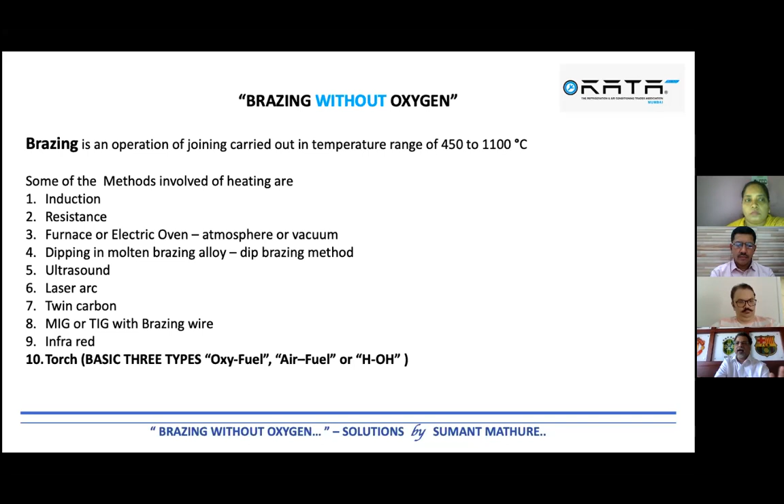So you get a cation and anion reaction where H and OH get separated. This same H and O is collected under pressure, passed through the torch, and burned. That is known as HOH burning, where oxygen or fuel is not used directly, only water is used. These are the three basic types of torch brazing techniques.

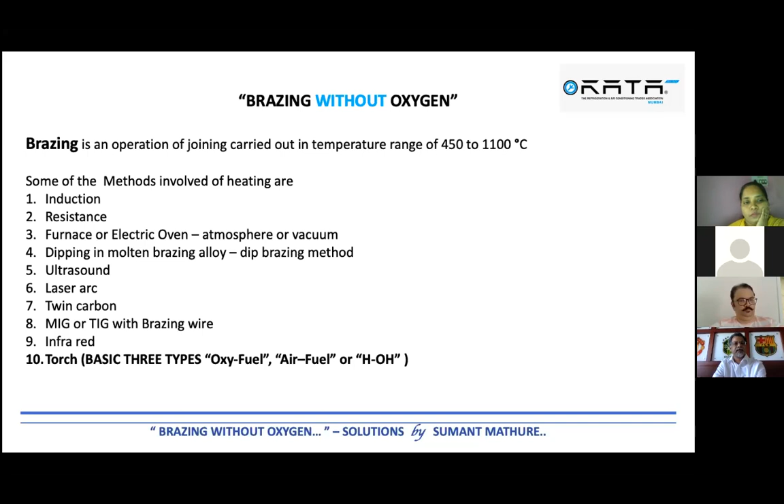Now, since our topic is basically on brazing without oxygen, we are concerned with torch brazing. In torch brazing, it is basically a combination of air, oxygen with air, or fuel inside the torch, burning at the exit of the nozzle. Hence, torch brazing without oxygen is not possible.

Oxygen is required at some end. However, we can use air, or we can separate oxygen from air, or we can electrically separate water to form H and OH combination. This kind of torch is known as a hydro torch or aqua torch.

So the first one, with oxygen and fuel composition, normally uses gases like acetylene, propylene, natural gas, or MAPP, which is methylacetylene-propadiene gas. Then there's propylene gas, and LPG which is again a mixture of butane and propane, etc. These are basically the gases used.

Here, actually, I had a video, but since it is not playing, I don't want to play it now and waste the time.

Second is air fuel. Most of our guests today will be talking about this kind of torch. So I will not talk much on these torches because there's a lot of information they can share with you in this particular area, where the design is also there and some other areas also there.

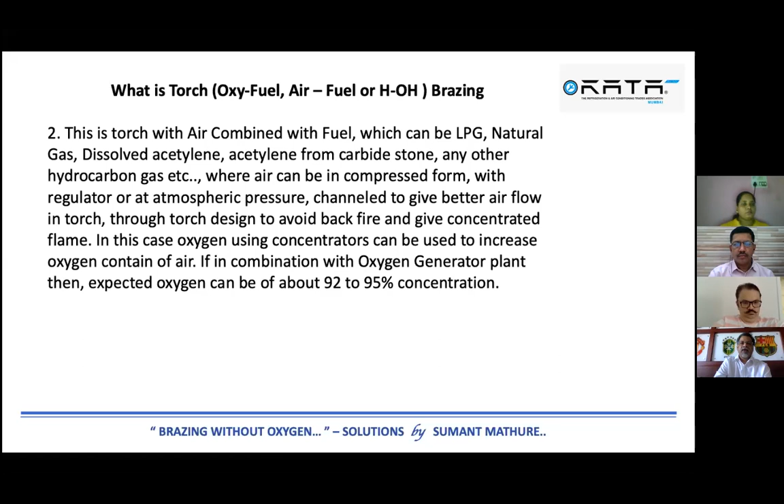Normally, there are methods of even getting oxygen from a generator, and there you can get oxygen up to 92%, 95% concentration. You may also see some videos where they're using concentrators and doing brazing using air or compressed air.

And there is a third type of torch, using fuel as H and OH. These are the torches where normally electrical current is given and you get hydrogen at cathode and oxygen at anode. These are then separated and combined into some chamber.

It can be pressurized, and the whole thing can be brought through one single pipe. It has a higher calorific value simply because it is forming a single molecule. There is no loss, no byproducts, and the pollution is less in this kind of thing. These are known as aqua torches or hydro torches.

Many people in Europe, Korea, and America are using these aqua torches or hydro torches. If you see some of the jewelry industries, they've been using aqua torch as a pencil torch for more than 15-20 years in India. So aqua torch is not very new to India. It is already there for jewelry manufacturers, where the pencil torch is used and is very common.

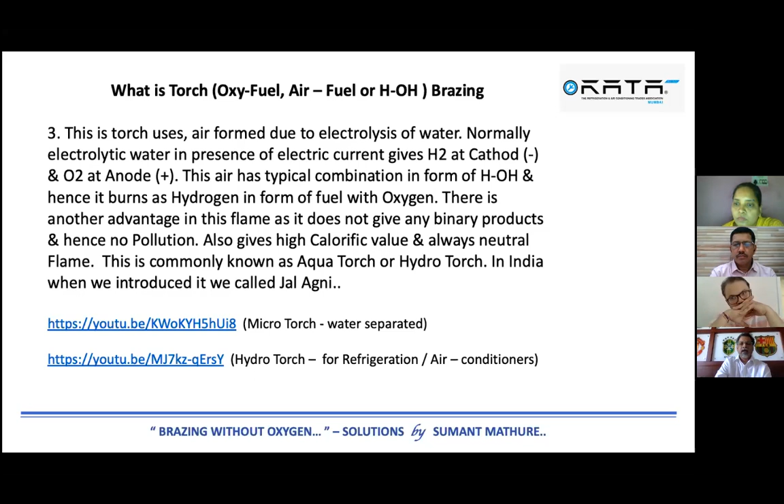So this is the third type of torch. Now, what are the requirements? If you put it from the user point of view, what are the requirements they want in any kind of brazing? So I've jotted down a few requirements, both from the user point of view and from the torch point of view. This is for discussion as well as for you to think about whenever you are deciding on a torch.

Number one, you should have a good flame pressure. Your inlet gas pressure should be good, so your torch design is very, very important in this. You should have a flame which gives a high calorific value, because the more the calorific value, the lesser the time required for brazing, or lesser losses on the gases.

Then you should have a full combustion requirement. There should be 100% combustion with the fuel and oxygen. If you don't have proper combustion, then the area where you are doing brazing can become poisonous for you, because most of the gases coming out are then carbon dioxide or carbon monoxide.

Then you should have a concentrated neutral flame. If you have a concentrated neutral flame, you will always be able to do better brazing, because you can then concentrate your efforts on the area where you want to hit, rather than hitting a larger area. This is known as having no flare. And the last requirement is less pollution. As I mentioned about combustion, the byproducts from combustion should not form that much. So that is something very, very important.

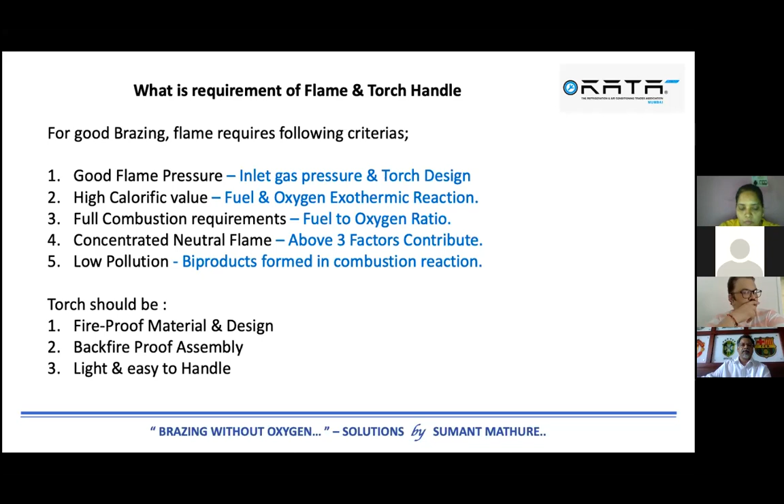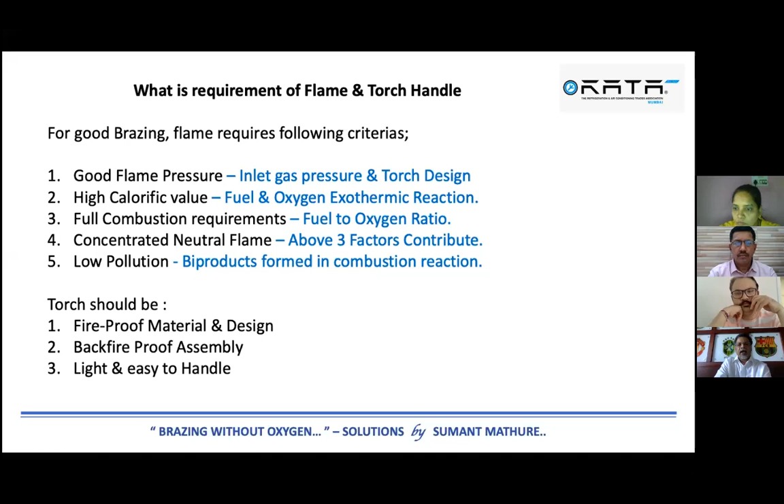Now, when you think of this, what sort of torches must we have? We should have a torch with fireproof material or fireproof design. You should have a torch which does not give any kind of backfire, or at least has a backfire-proof assembly. And the torch should be light and easy to handle. So these are basically the three requirements of the torches.

Now, many people ask me as a consultant, what should the ratio be between oxygen and acetylene, for example? So I have given you the reaction here, and it's very easy to understand. If you take 2 molecules of acetylene and 2 molecules of oxygen, the very first primary reaction you get is 4 of carbon monoxide and 2 of hydrogen. This is normally called the primary reaction in the core. So whenever we say a neutral core, what is the core composition? Everybody says the core composition is one molecule of acetylene with one molecule of oxygen, which is not entirely right.

But you have to consider the secondary reaction also, which happens in the flare: the 4 of carbon monoxide and 2 of hydrogen then need 3 more of oxygen to complete the reaction, forming carbon dioxide and H2O, water molecules. And that is a complete reaction because all the products formed are 100% stable. This is the whole reaction.

Now, if you see this reaction, you have 2 molecules of acetylene requiring 5 of oxygen, which means 1 molecule of acetylene requires 2.5 molecules of oxygen to form a complete combustion reaction. So the ratio comes out to be 1:2.5. Whenever you use air instead of oxygen, your ratio may increase to 1:3, 1:4, or 1:3.5. I think the other people on the panel will explain this maybe better. But this is how your pressure or composition would change to get complete combustion.

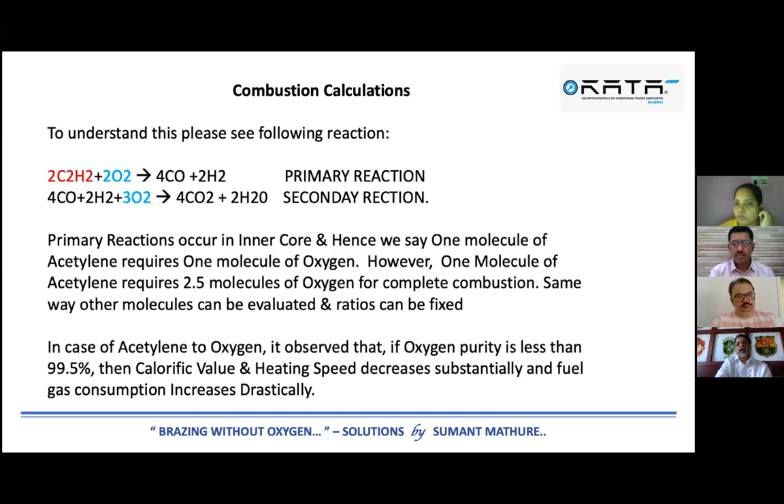So this is just one of the thoughts I think we should consider when having a torch without oxygen. And here I'm suggesting some solutions. The very first solution is to try to convert the gas brazing joints to the nearest possible heating source, like we have seen with the 10 sources. Out of those, the 10th one was the gas brazing or torch source.

So the rest of the sources are available. If you find that you have a joint or combination of metals where you can use any other method of brazing like induction or resistance, you may be better off changing to that. For that, you need to have a joint design, and you may have to consider the limitations of the new heating source. If that is possible, then you can go for that.

The second choice is for joints where more heating, time, and more flare is acceptable. Sometimes when you braze with air and acetylene or air and LPG, you'll find that the flame is not that concentrated, it has more flare. So if you intend to heat only a 5 millimeter section but end up hitting double or triple that section, like in HVAC joints, that's acceptable, then you can go for LPG or acetylene with air.

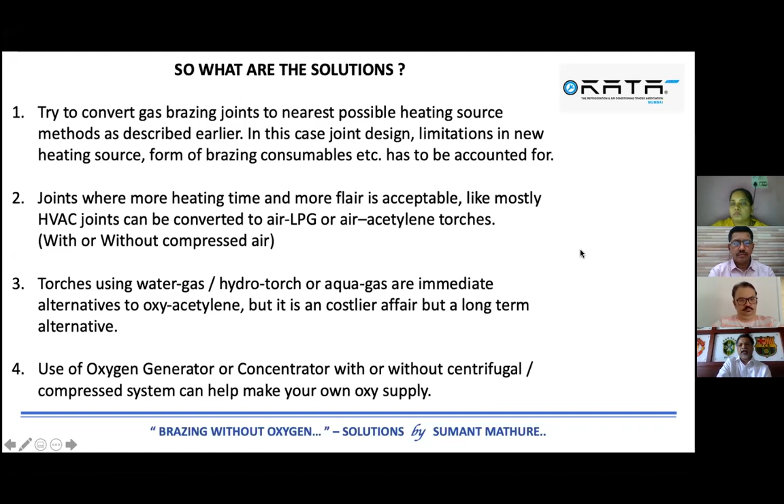The third option is using a torch with water gas, hydro-torch, or aqua gas torch. These torches are a little expensive to buy, but for long-term use the working cost is very, very less, making it a better alternative. The fourth alternative is to have your own oxygen generator. I think many people are doing that kind of thing, having their own oxygen generator.

So which means you will have your flame to do your brazing job. In torch brazing, we have mainly two options of torches. The first one is air fuel, which we'll discuss today. I'll give some information about it because this option does not require any oxygen source, since it's already in the atmosphere, it's in the air. The second one is oxyfuel, which has both a fuel source and an oxygen source.

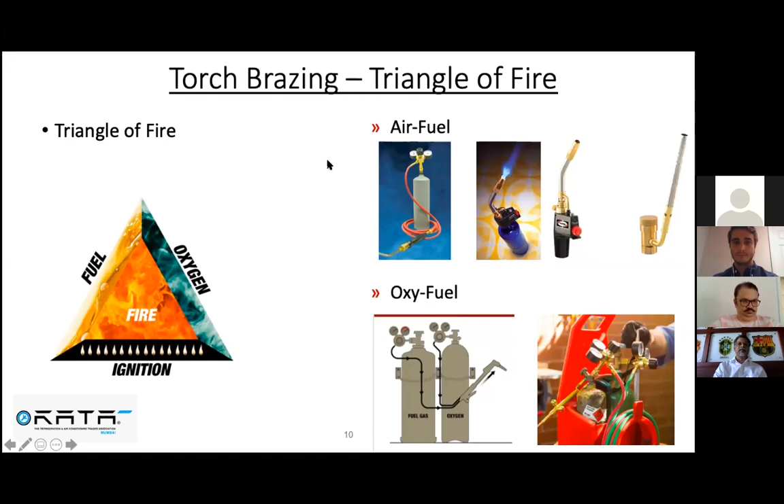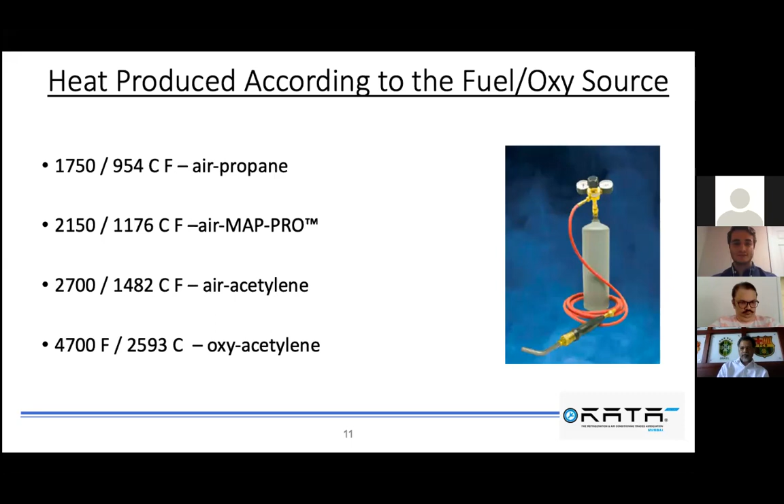So we can see that there is a wide difference between oxyfuel and air fuel, and this comes from the source of oxygen.

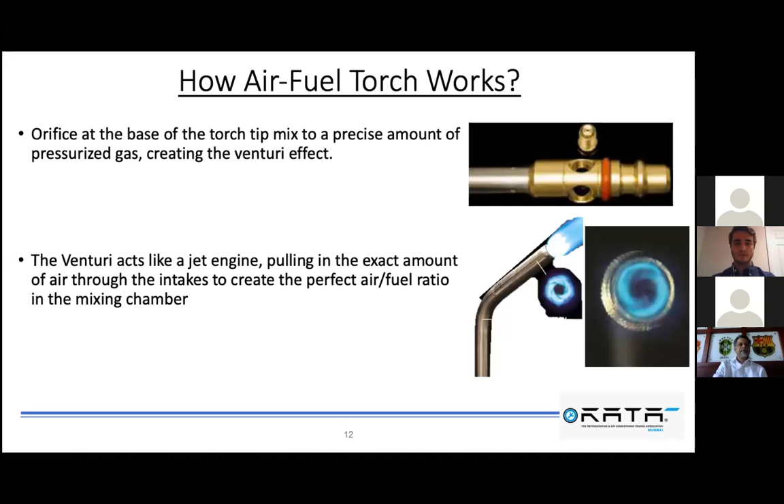Benefits of an air fuel torch: first of all, you don't need an oxygen source. Here in the US, a lot of contractors, people that go to your house to fix your HVAC or plumbing pipes, would rather carry just one cylinder instead of carrying two, oxygen and fuel. And in today's situation in India, it is also a solution for those who used to use oxyfuel torches.

It requires less equipment. You do not need to adjust the flow of the flame on the torch. With an oxyfuel torch, you have to adjust the regulators, the pressure according to the tip you are using, and also the valves on the torch to adjust the flow according to the tip. So you have a very unique measure basically for each tip used in the job.

When we are talking about air fuel, for instance, we use for acetylene just 15 psi. I think 15 pounds if I'm not mistaken, but it's just a fixed amount, always 15 psi. It doesn't matter the flame you want. If you have an adjustable torch and want a lower flame or a hotter flame, you always set it at 15 and you'll get your job done.

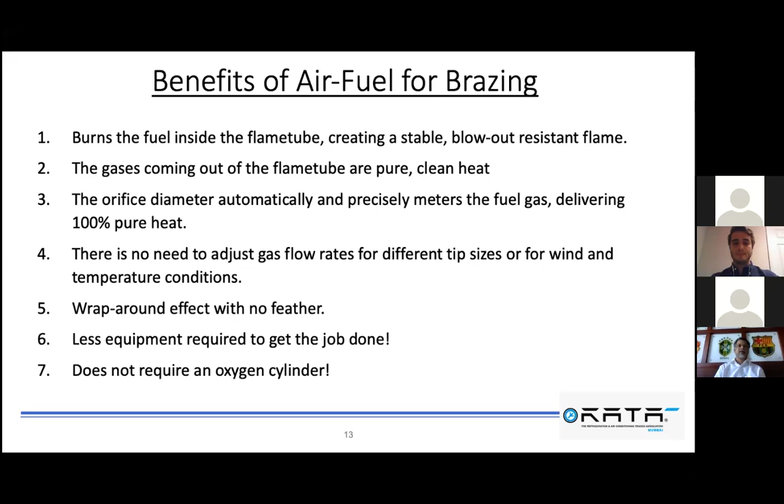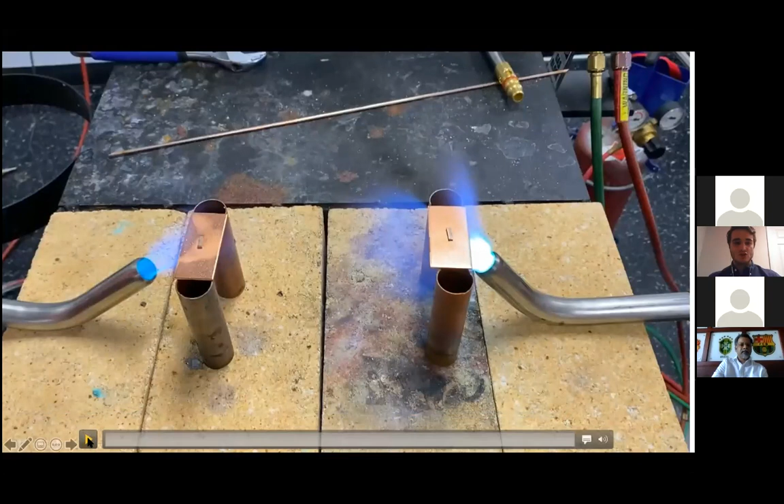This video, I'm not sure if it will play well, but perfect, we are able to see it.

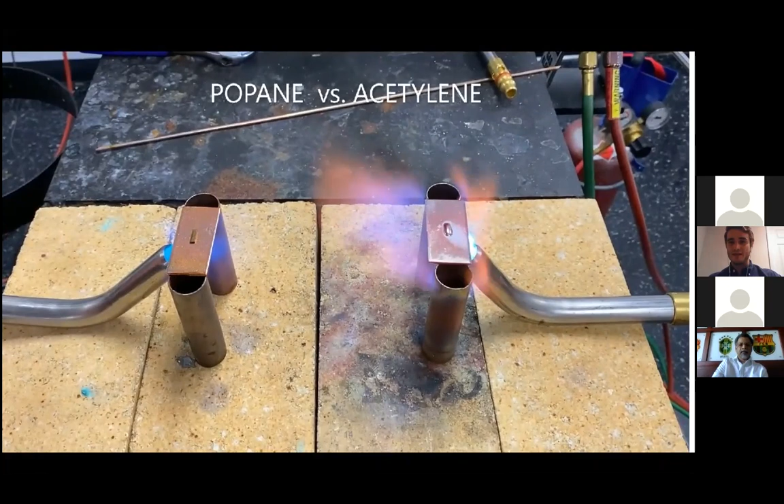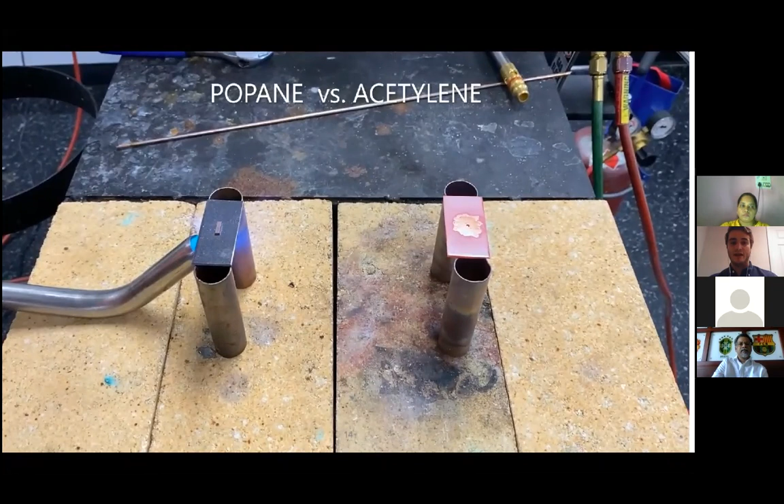This video is a homemade video we did at Harris. Myself and my manager recorded this video to show Faith and our partners how air fuel works, and mainly the difference between acetylene and propane air fuel.

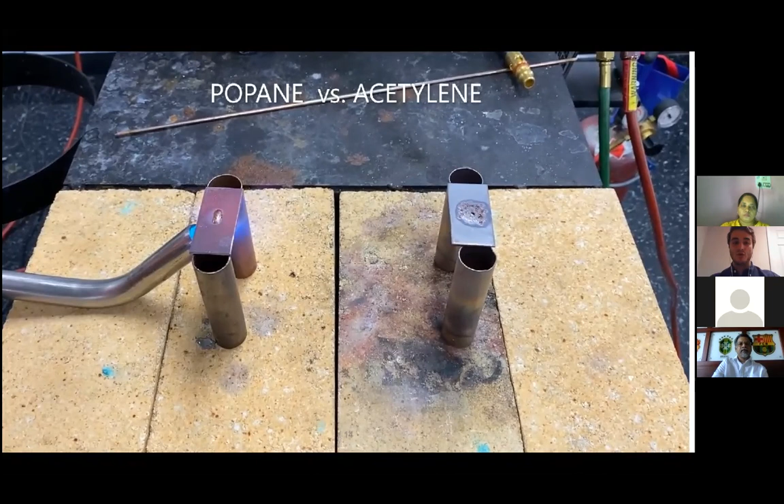You can all see the difference on the left side. We have the propane torch, both at the same pressure settings, open at maximum level, valves wide open. But you can see that it takes double the time, as Mr. Mathur was talking about before. He said around 15 seconds on acetylene and 30 seconds on air propane, and this is exactly what we found.

It was actually 16 seconds on the acetylene to start melting the alloy, and 30 seconds on the propane.

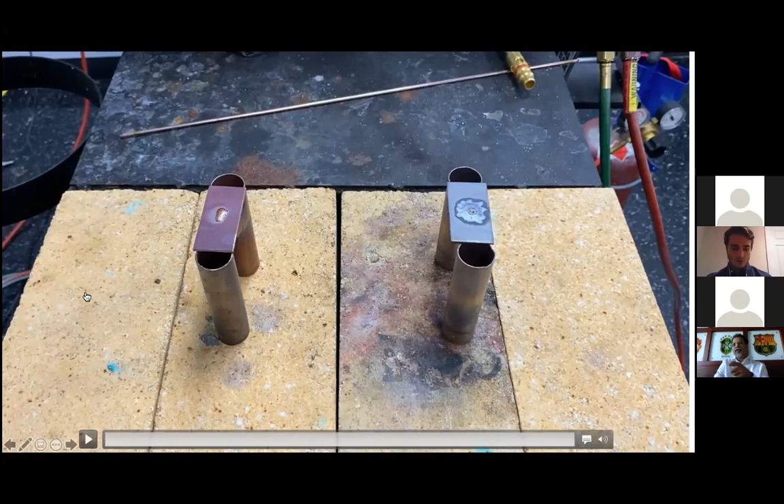The reason behind that: if you look into the combustion rate on air fuel, for acetylene it is 1.5 oxygen molecules to 1 of acetylene, and for propane it is one propane molecule to 4 or 5 molecules of oxygen.

So you don't have it as pure as when you're using an oxygen cylinder. That's the main reason why acetylene will work way better, hotter, and better for your application on air fuel torches.

Thank you very much, good evening to all. Thank you, Mr. Mathur, for my brief introduction to all. As you know, in the introduction Mr. Mathur has quickly listed the various brazing techniques that have been used for brazing, and we can say the technique, rather what Mr. Mathur said, is basically a heat source which is required for the brazing.

So these are the techniques one can use when the industry is facing a scarcity of oxygen. In this list, one technique is called torch brazing, and the hydrogen generator is the technique which is among the torch brazing techniques. This hydrogen generator basically produces a safe and better brazing flame, using hydrogen and oxygen generated by electrolysis of water.

As Mr. Mathur rightly said in the beginning, it is not a new technology. It is known by science way back in the 1800s. So what you need to generate hydrogen and oxygen: we need water, an electric power source, and we have to do electrolysis. We may or may not need chemicals, because some of the hydrogen generators are made to work with pure water, or maybe with little chemicals added to initiate the reaction.

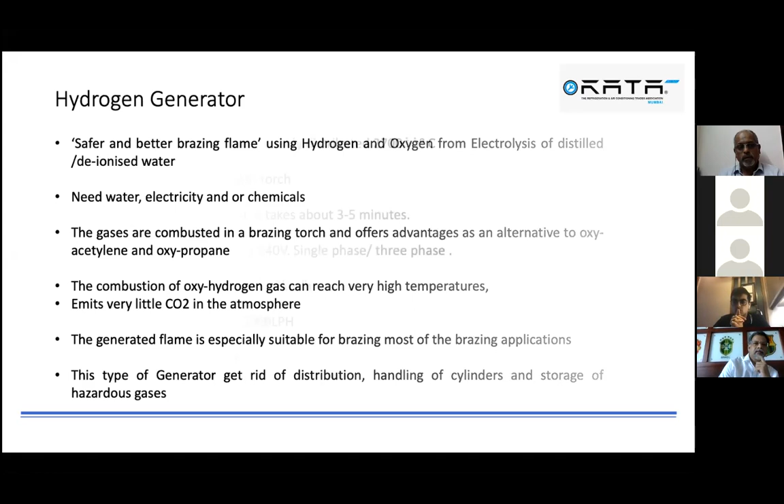So these hydrogen generators produce a flame temperature of around 2700 degrees centigrade. The design of the torch is so light, it's easy to braze, and the weight is absolutely light. You people must be worried that the system will take a long time to generate this gas once you put it on. For your information, it takes just 3 to 5 minutes after you switch on the generator. You can start your brazing operations within 5 minutes.

These generators are available on AC and DC power sources. The voltage requirement can be 110 to 240 volts. They are available in single phase as well as 3-phase, depending upon the capacity of production. The power consumption also depends on the rate of producing these gases, varying from 2 kilowatt per hour to 12 kilowatt. With 2 kilowatt, we can produce gas at a rate of 300 liters per hour. When you reach 12 kilowatts per hour, the rate of generation will be 3000 liters per hour. So depending on the capacity of the generator, the gas produced will be different.

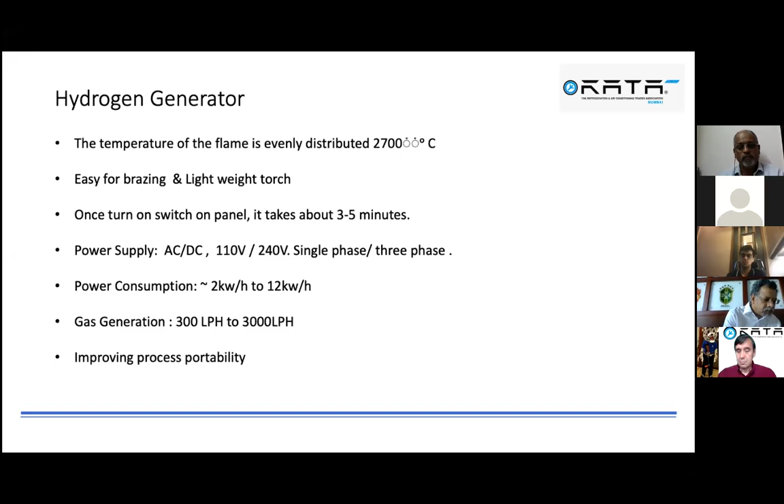And these generators are not heavy in weight, they are very portable. So you can easily install it, relocate it, reinstall it - very light in weight and easy to install. Next slide, please.

So in conclusion, what I mean to say is that this hydrogen generator is a very reliable and economical technology, which can serve to sustain this industry in this competitive age. As you know, today we are in an era of cost competitiveness, so with this technology or heating source, we can be cost competitive - our brazing components can be cost competitive.

From the safety point of view, there is no flashback, so operator safety is taken into consideration. It has produced a very uniform temperature, and the flame temperature is around 2700 degrees centigrade. The operation and the flame are very silent, so the noise pollution is also less compared to conventional

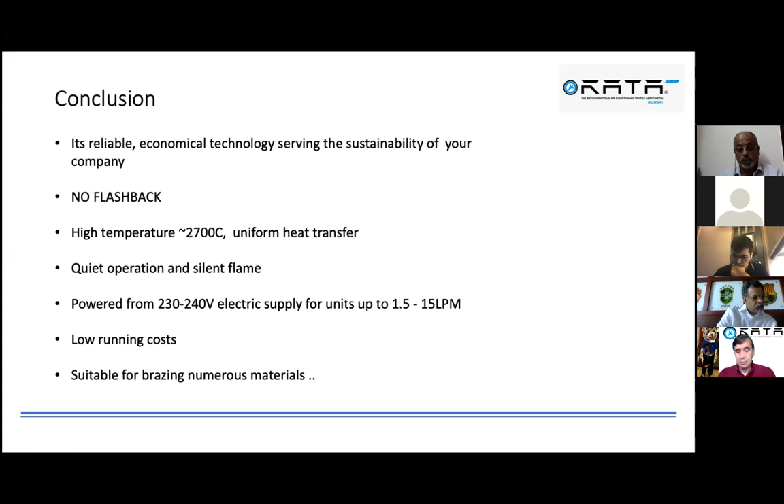Gas is being generated. The running cost is very low, and the cost for maintaining is also very low. The running cost is the cost of the distilled water and the power required for generating the gas through electrolysis. And as I said, it is suitable for numerous brazing applications, or we can braze numerous materials. Thank you.

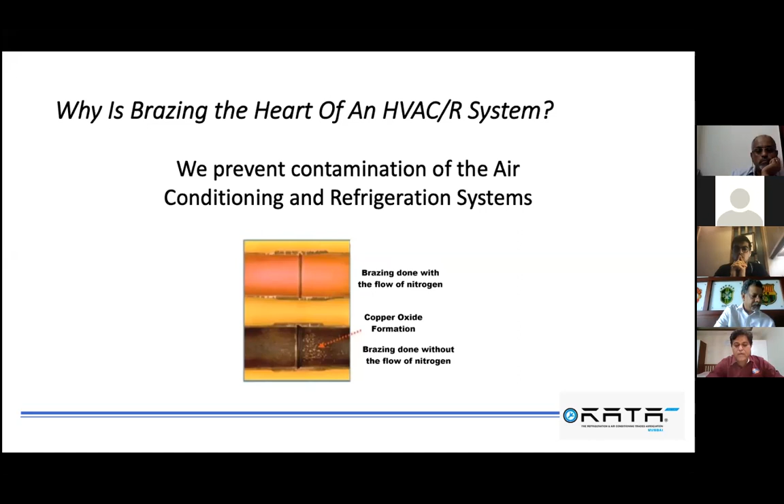In our first slide, we have mentioned what is required for successful brazing. We have to flow nitrogen while doing the proper brazing. Next, please.

To flow the nitrogen is not sufficient. We have to know what pressure of nitrogen we have to flow during the brazing process. So there are a lot of products already available in the market, like the nitrogen flow indicator, NitroView. I think Mr. Richard will give some more ideas about such products. So, Mr. Richard.

Thank you, and I just want to appreciate the invite to be among such a distinguished organization and guests. It's a pleasure to see you all, and definitely this is an important topic on brazing. There are so many methods. I just want to express that one always must evaluate their specific needs and requirements.

As Mr. Bernardi mentioned, air fuel or air acetylene torches are very common usage in the United States, but not so much in the rest of the world. There are reasons for that. Number one, it's unknown. Number two, many times the technology in the air fuel torch is also unknown, and so lesser designs and technology are introduced in the market. They don't work and people don't use them. But in the United States, it's been a proven technology for quite some time.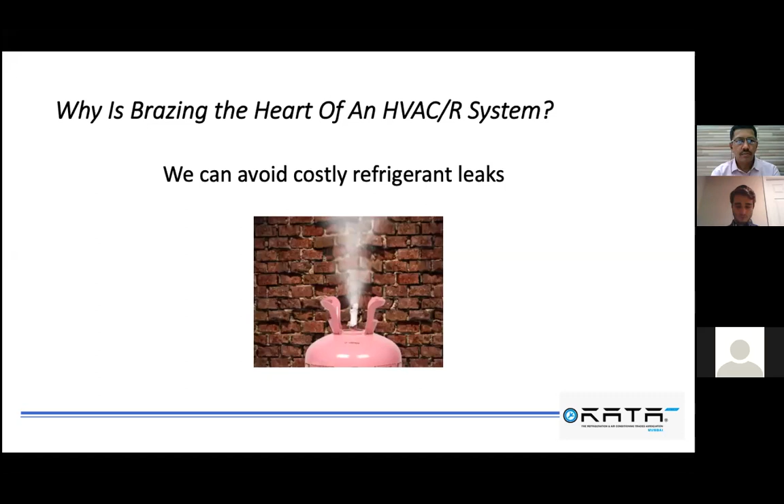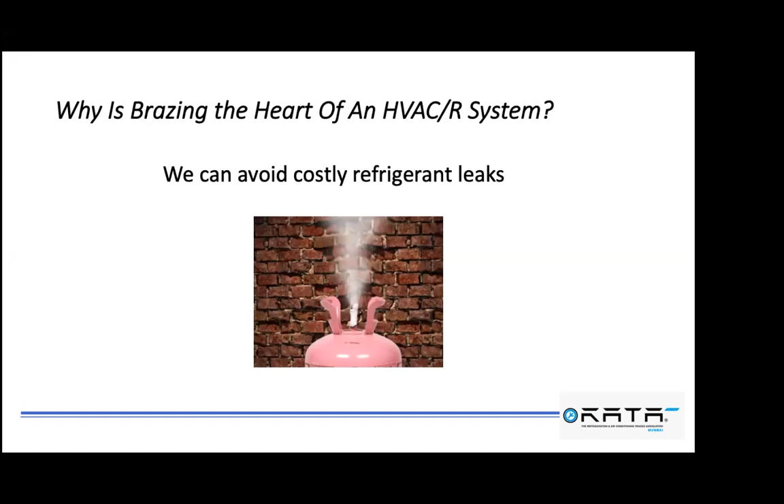So there are lots of pluses and minuses as to why you might go one way or the other. But in general, in HVAC, most applications and most technicians will be satisfied with air fuel, air acetylene precisely, to do the job for them. And as Arun mentioned,

we want to ensure, we'd like to think of brazing as the heart of the refrigeration system, because if you don't get that right, then you're going to have failure. You're going to have inefficiencies in the systems. You're going to have your expansion valves contaminated with soot and copper oxide that forms on the outside, and can also form on the inside.

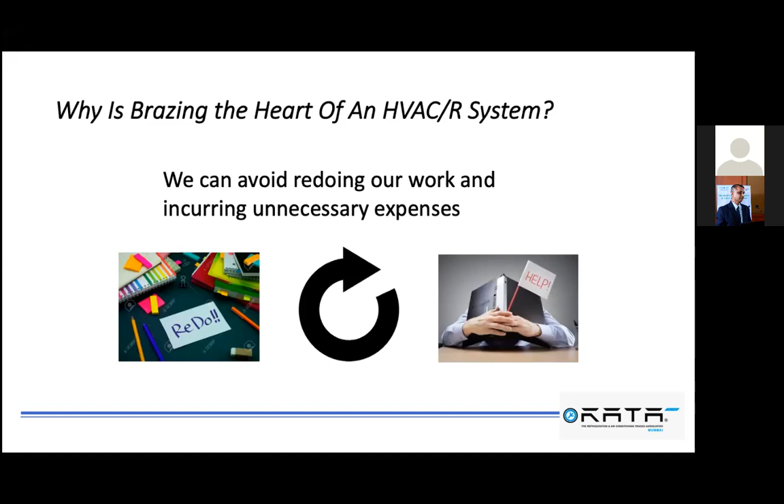That's why when we talk about running nitrogen through there, we have to make sure we're always running nitrogen to avoid forming that copper oxide inside, so it doesn't contaminate the expansion valves or run to the compressors and damage the systems. So proper flow is also very important, because if you don't have enough nitrogen flowing through the inner tubes to displace the oxygen, which forms copper oxide with the heat, then you're still going to have it formed. You want the correct flow, and you also don't want too much flow, because that will push against the joint and you end up having little pinholes and refrigerant leaks. So it's very important always to get the correct braze job.

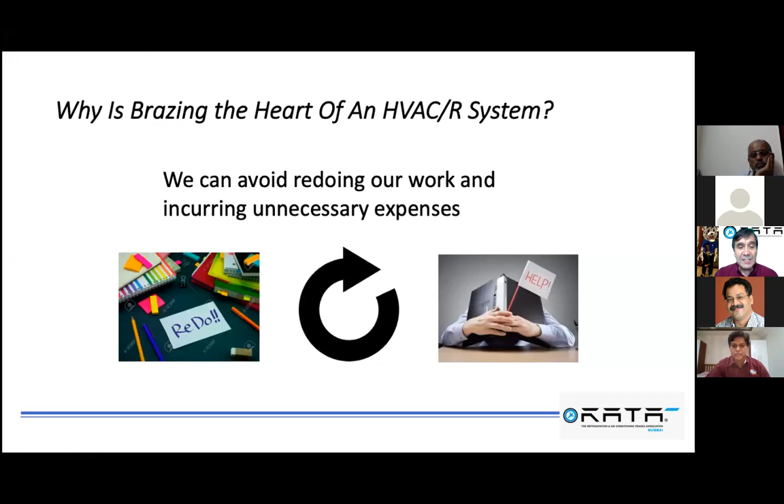I'm not sure how many more slides we have, but I want to express that as great as the air-fuel and air-acetylene systems are, there are a few limitations. One is the supply of oxygen - we're taking oxygen from the ambient air that's mixing with the fuel, whether it's LP, acetylene, MAP, or another fuel gas. So if you're at a very high altitude or in a very enclosed, small area, there may not be enough oxygen to mix. These are some considerations to take into account.

But overall, air-acetylene, for example, is very widely known here in the US, and as Mr. Bernardi mentioned, it's very low cost to operate as well. You use one tank, it's a lot more portable to get from one place to another, and it just provides the solution.

Finally, I want to mention that when we're faced with challenges as we are now during the pandemic, and the world faces so many different challenges in so many areas, it's just a reminder that we must always be preparing. I think it's awesome that an organization like RATA provides this knowledge base throughout the year. So take advantage of that and learn - don't wait for a crisis to know about these technologies. Be prepared, and it's always a great time to sharpen one's skills. I thank you for having me, it's been a pleasure seeing everybody.

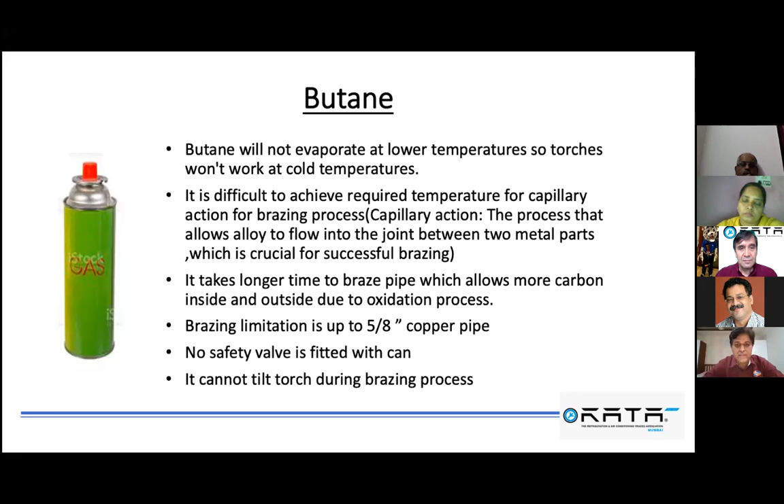It has a built-in safety valve or pressure relief valve inside the cylinder, because technician safety should be the first priority for our industry. It's also very portable - the net weight of the cylinder, including the gas, is not more than 800 grams. This fuel burns approximately 40% hotter than propane, allowing users to carry out hotter working tasks without needing any oxy-LPG setup.

Special torches are available in the market for propylene which can braze up to 2-inch pipe without oxygen - this is also very good to tell my technicians. Special torches with 360 degree swivel can operate in any position, which solves that problem with butane, since you cannot tilt butane cylinders. Here you can swivel 360 degrees. Next slide, please.

Mr. Richard, from here you have to go forward. Oh, excuse me - I have to do the PowerPoint from here, yes, from here it should be, but I don't know if we have the video incorporated there. It's already incorporated in the last slide - I think Mr. Samant already incorporated the videos.

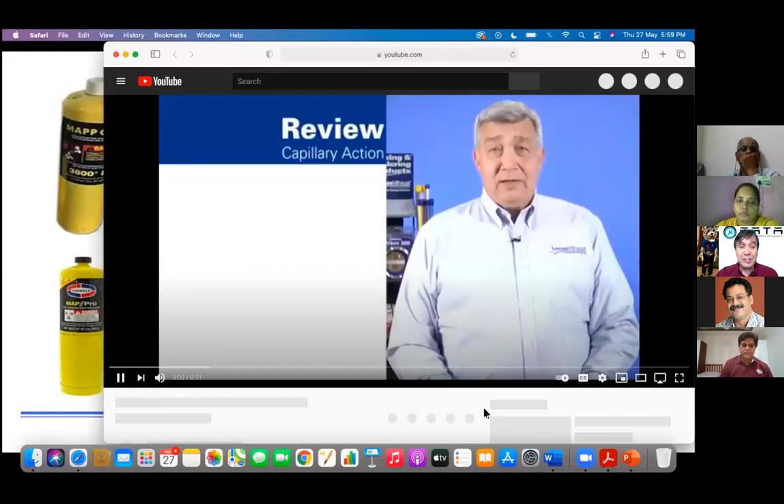That's where you actually form the strong braze, because if you don't have that penetration with capillary action, you're going to have a weak joint. And when you have a weak joint, any vibration is going to loosen that, and you end up with refrigerant leaks, which are very costly. So we use these.

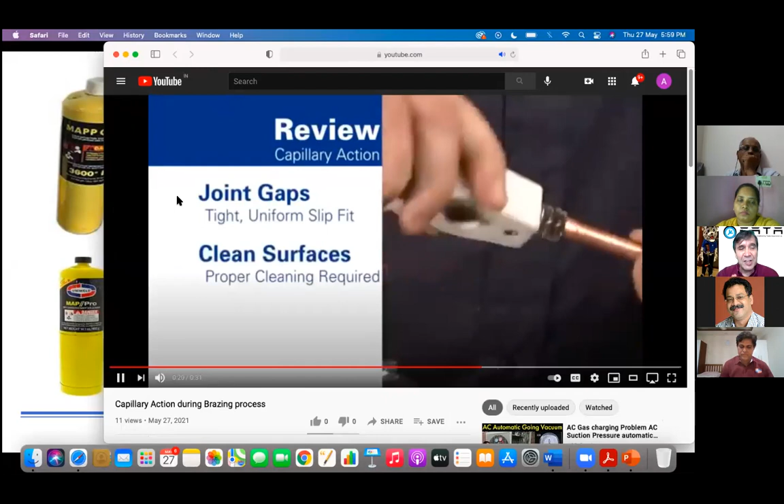Variation in spacing will affect the success of your brazing operation, because capillarity will be compromised. Second, cleanliness counts in brazing. Parts that are not properly cleaned may carry grease or other debris, which will impede the process of capillarity. Successful capillary action, the process that allows alloys to flow into the joint between two metal parts, is crucial to successful brazing.

That got cut a little short. What that part of the video shows is two glass plates, with ink running between them through capillary action. When there's a separation that's wider on the bottom than on the top, that ink does not flow all the way to the top.

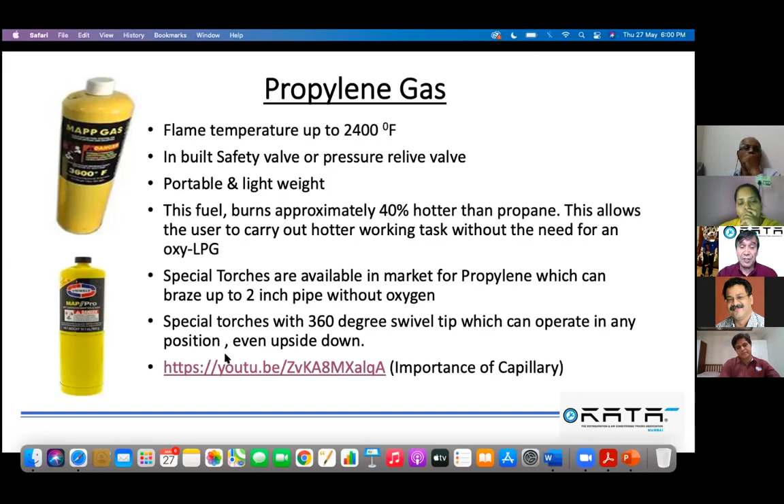Similar thing with a copper tube. If the diameters are not evenly spaced from the one being inserted into the other, you won't be able to form great capillary action and run the alloy through. So you want to make sure you get a good braze joint by having proper heat around the entire tube. It's important not just to fill the alloy on top, but it needs to penetrate the copper tube.

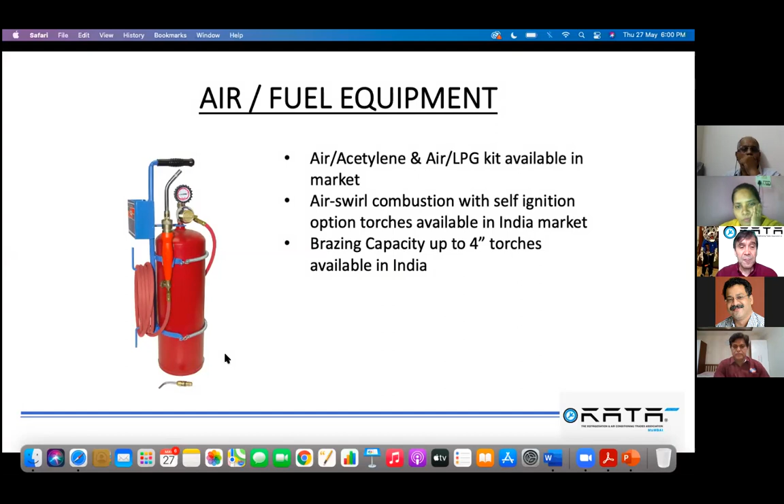This answers the technician's question about whether it's possible with LPG or acetylene without oxygen. We already have special torches available in the market called swirl combustion torches. These swirl combustion torches' flame work 40% hotter than other air fuel torches. It completely burns the fuel inside the flame tube, creating a stable, blow-out resistant flame.

The high velocity clockwise swirling flame has a wraparound effect with no feather. Higher velocity flame transfers heat better and minimizes the cooling effect of ambient air, so better heat transfer to the target decreases labor time and fuel cost. Next slide, please.

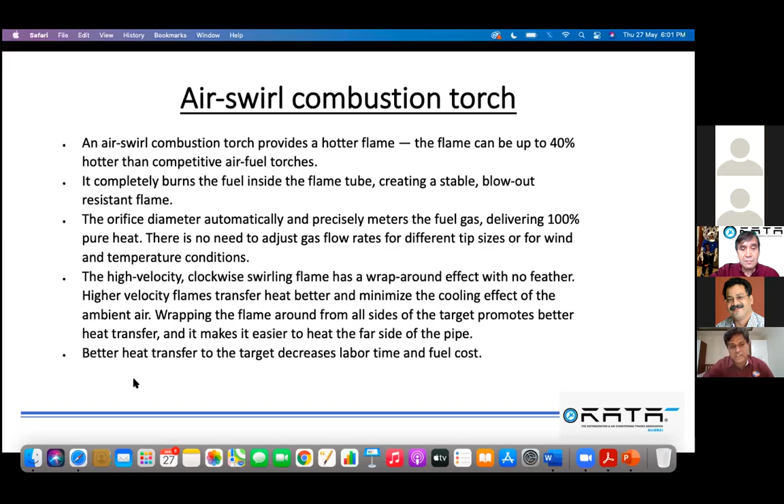These are some torches available in the market, the air LPG torches. With LPG we can braze up to 1 1/4 inch, and with propylene we can braze up to 2-inch pipe with the same torches. Next slide, please.

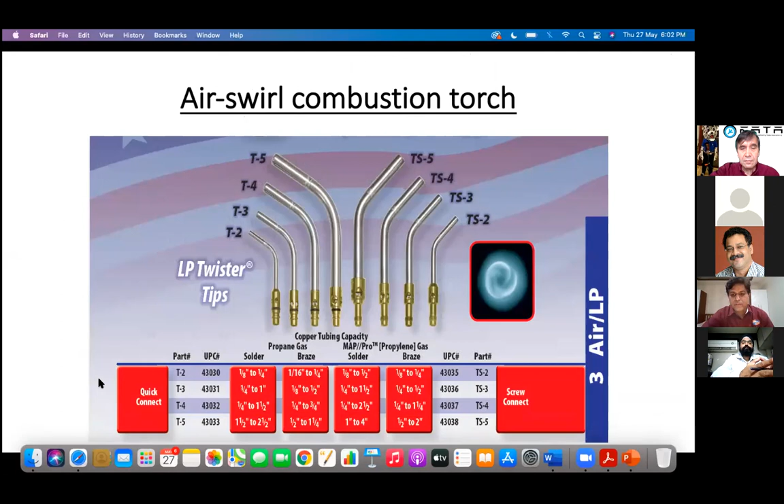These are some torches which work with air and acetylene. With acetylene we can braze up to 4-inch pipe without using oxygen. These are some specifications we have mentioned in this slide. Next slide.

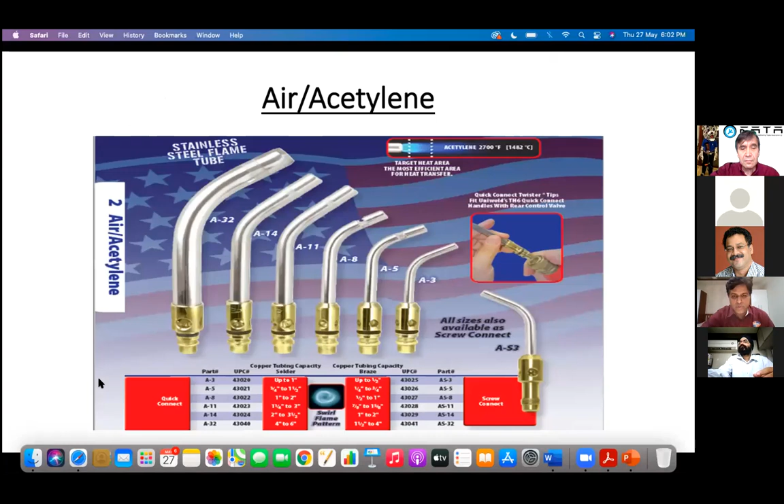The last question from the technician was: is it possible to braze a bigger size pipe giving 360-degree heat? So we have mentioned one video there - where is the video, Samanji? That is the Captain Hook video. Mr. Richard will explain this video more.

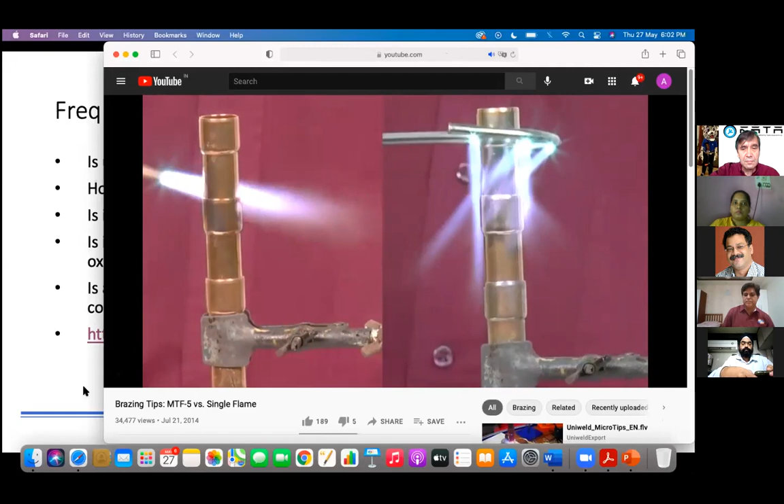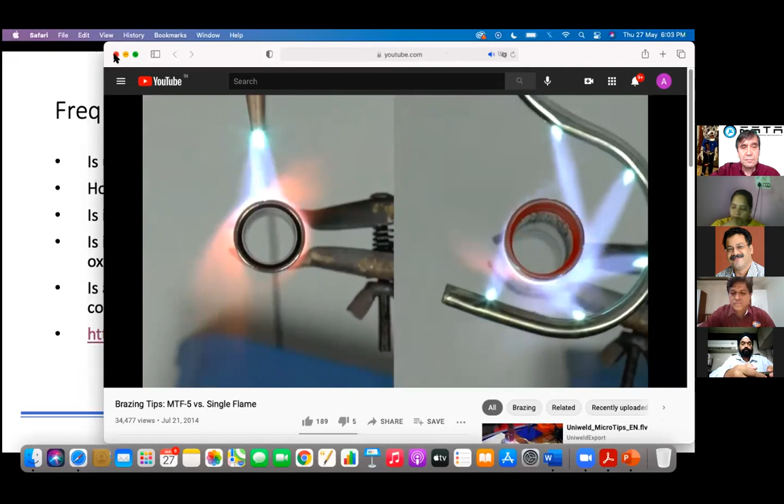Take a look at the performance of a single flame tip versus Uniweld's MTF5 multi-flame tip. With single flame tips, one must ensure to move the tip around the copper tube to achieve good heat distribution. With today's compact systems, this can be very difficult, particularly on the backside of the copper tube. Uniweld's MTF5 Captain Hook multi-flame tip, shown on the right, provides even heat distribution around the 360 degrees of the copper tube. In addition to providing 100% wraparound heat, the 40-degree flame angle easily flows onto the copper tube and away from sensitive areas, minimizing the chances of burning adjacent components. Uniweld, quality tools that go to work with you.

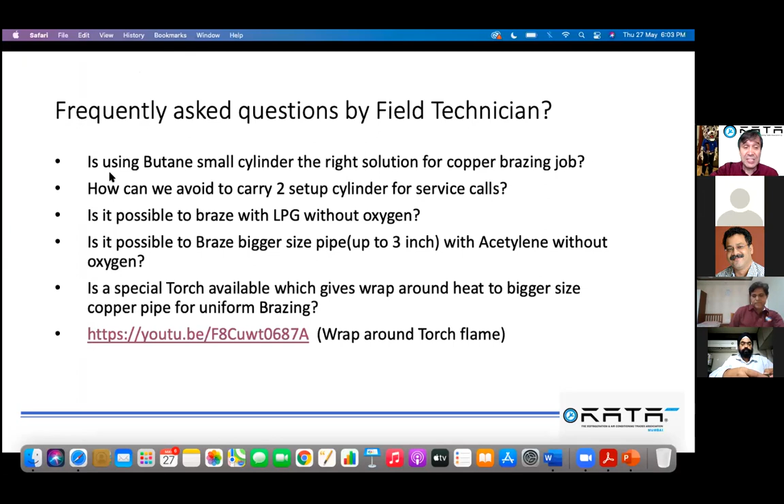So cleanliness of the tube, the proper size diameter uniform through the 360 degrees of the copper tube, and uniform, proper heating around the entire copper tube ensures that you get the capillary action required for a strong brazing joint, so you don't have leaks with minor vibrations, and you have a good, healthy system.

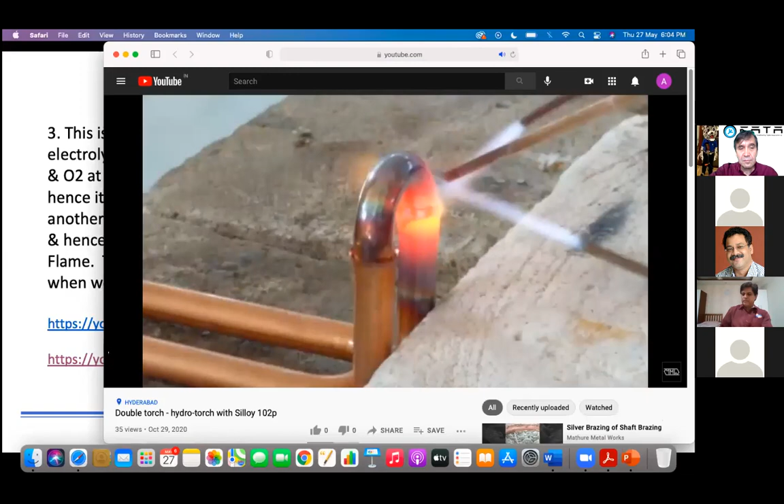This was with the hydro torch.

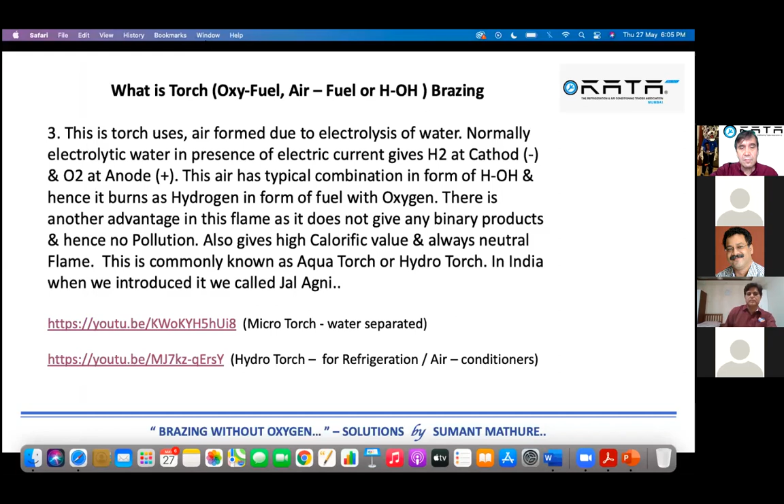This is what is called the pencil torch. It's just comparisons between the torches. And this is your standard torch, which is oxyacetylene.

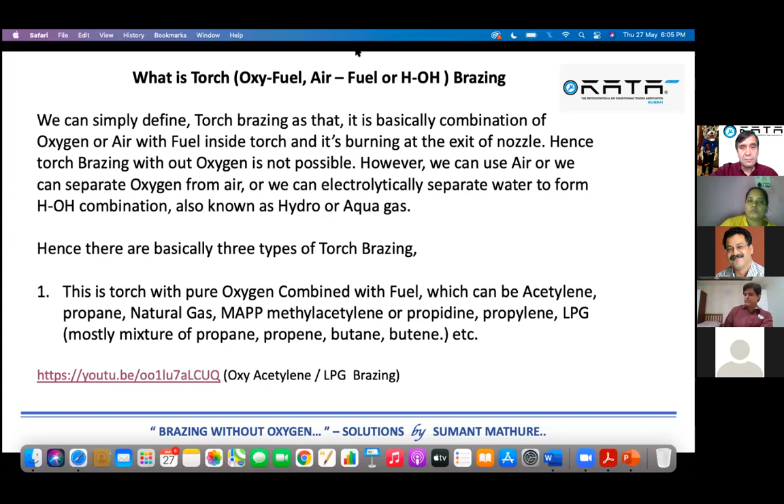Sumantji, there are a couple of questions in the chat. There's one from Mr. Dinesh Sarova, which asks what is better for copper to MS brazing, what kind of brazing is better for copper to MS. Can I ask Gabriel to answer this, please?

Madhuriji, I'll answer the question. I think Gabriel. Sure. Yeah.

So basically, for copper to MS brazing, if you are using an air fuel torch, then you need to consider that an air acetylene torch would be a better option. Obviously the diameter and thickness of the pipe you're brazing will matter. It will be slower than your oxy-fuel process, as already discussed. But also very important is the brazing alloy that you use. If you're brazing with a brass brazing alloy, it's going to be a little more difficult. But if you use a high silver brazing alloy, that would be better for your application. So with proper application of the flux and using an air acetylene torch, you should be able to braze your joint based on the thickness of your base metal.